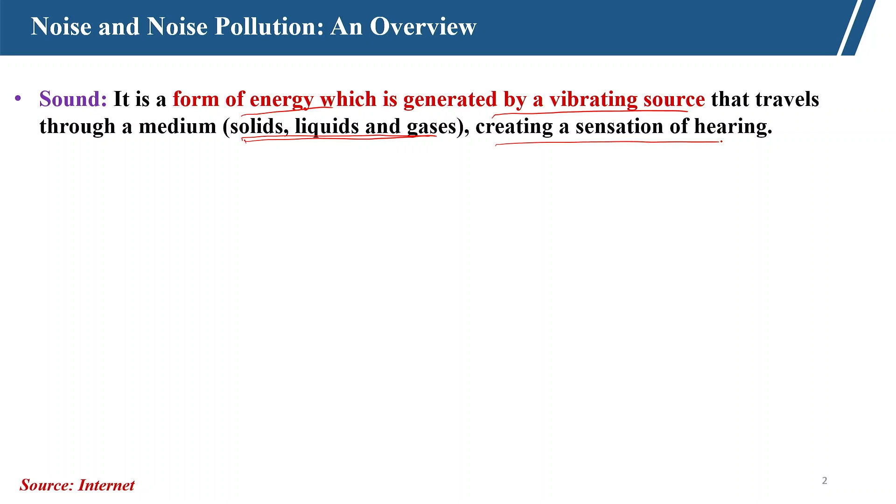Noise is basically a form of sound. Sound is a form of energy, generated by a vibrating source. If there is any vibration, it will generate some energy and finally form a sound. That sound may be within our hearing range or may not be, but it is energy generated by a vibrating source, and the sound can travel through any medium like solid, liquid and gases. For travelling, sound needs one medium, and when it travels and reaches our ear, that creates a sensation of hearing.

Now we can see this is the sound source which vibrates the air particles here, and air particles travel through one medium. Here suppose the medium is air. So through this medium, this travels and reaches to our ear. Due to the vibration, due to this energy created, the air molecules, the particles will start vibrating back and forth, which will create one dense zone and one light zone, and this will travel in this manner. But the particle will not travel, only the wave will travel; the particle will vibrate within this zone.

So, we will discuss this a little bit in detail and try to understand the various forms of sound. The noise is a little bit different; it is a form of sound, but it is generally defined as the unwanted and unpleasant sound. That is called noise, and it can disturb daily activities and reduce the quality of life. So, noise is a form of sound, but when it becomes unwanted or unpleasant, then we call it noise.

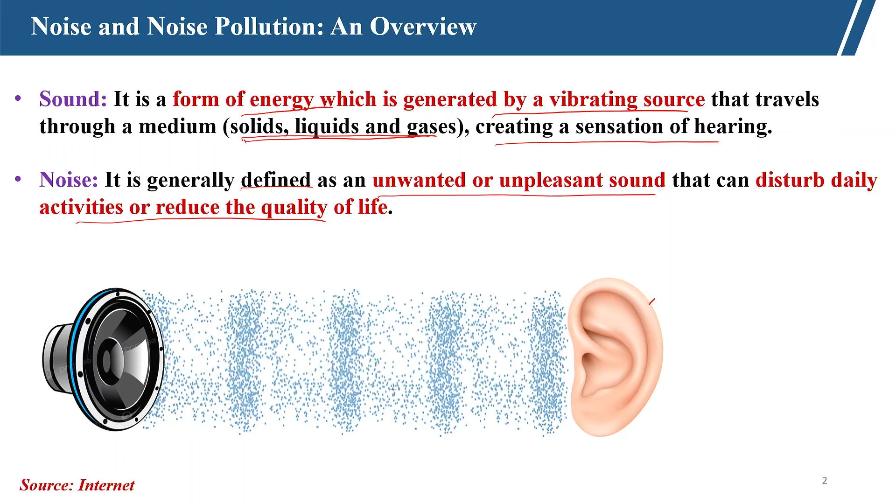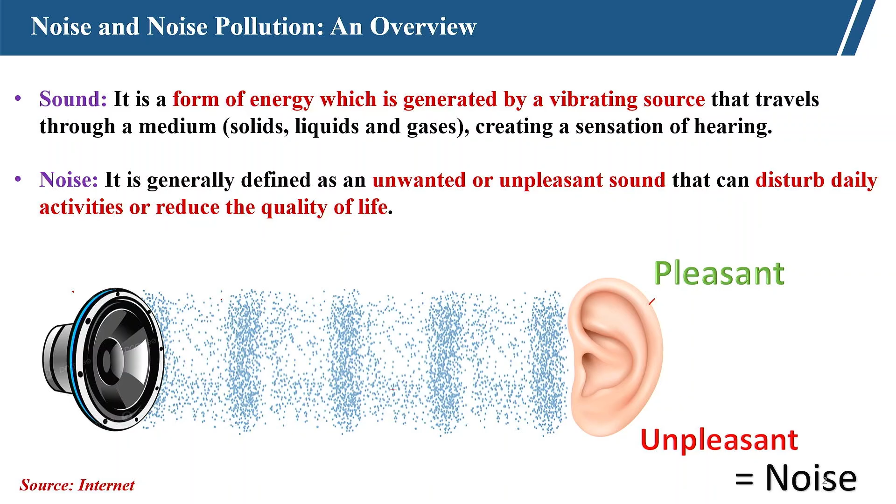So, it may be pleasant - sound can be pleasant - and if it is unpleasant, then we call it noise. So, our main focus is noise which is actually harmful, not only for humans, but for other animals also. So, first we will try to understand how this noise actually affects humans in different ways, as well as animals. So, if we know the problem, then we can control this noise from the source itself.

So, as I have mentioned, all noise is sound, but not all sound is noise. If it is pleasant, then we will not call it noise. Suppose a beautiful song someone is playing, which is not creating any unpleasantness, then we will not call it noise. But if someone is playing at a very loud voice, then the same song, same music may be disturbing, unpleasant - so then it becomes noise. So, there is a fine line to differentiate sound from noise: sound means a pleasant sound, or noise. So, the factors here are its intensity and loudness. Suppose one music is played with low volume, low loudness - then it can be pleasant, but if the intensity of the same music is high, it has become loud, then it will become noise.

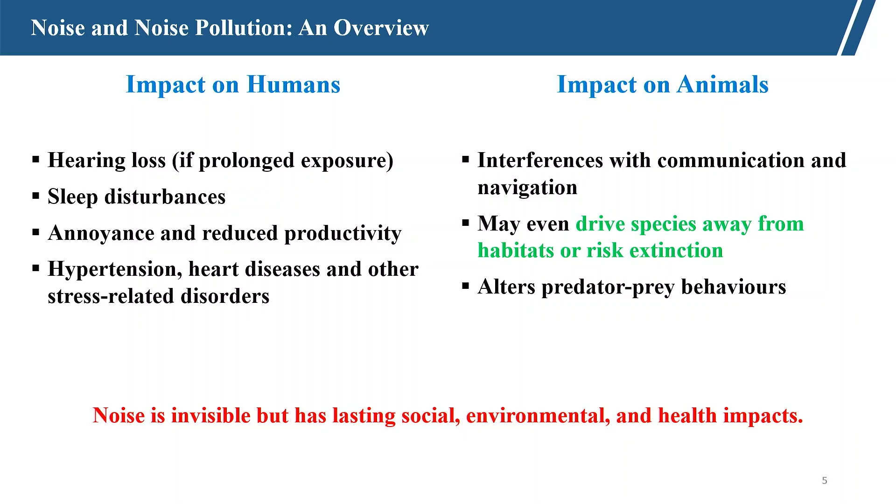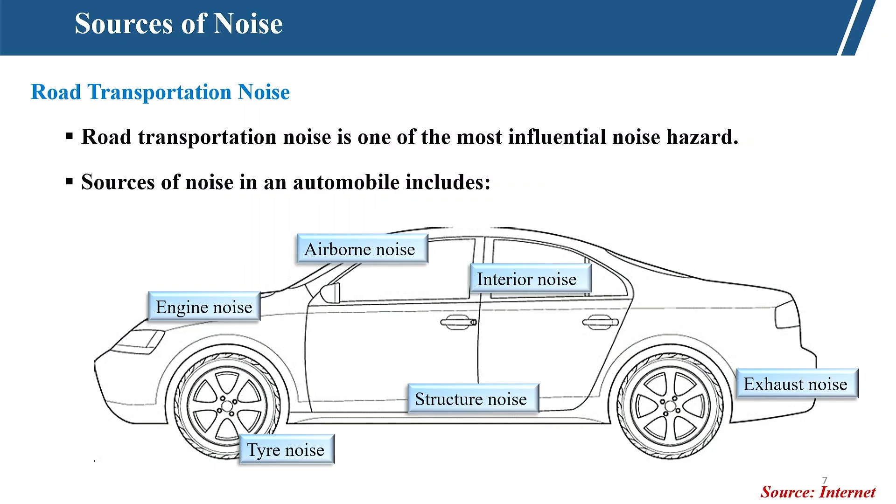Like in exhaust noise, there will be noise during exhaust, but can we reduce it, can we minimize it? Yes, we can minimize it by using a proper insulator, which is mainly textile material. Even engine noise, even total interior noise, we can use textile material to reduce the noise inside the automobile, even for outside people.

Engine noise is a major noise generation source, coming from combustion noise and mechanical noise. As we know, during combustion there will be noise, and during the mechanical movement of the parts there will be noise generation. So we can try to minimize it, but it is not possible to eliminate. If we select the textile material for sound insulation, we can reduce the noise to a greater extent.

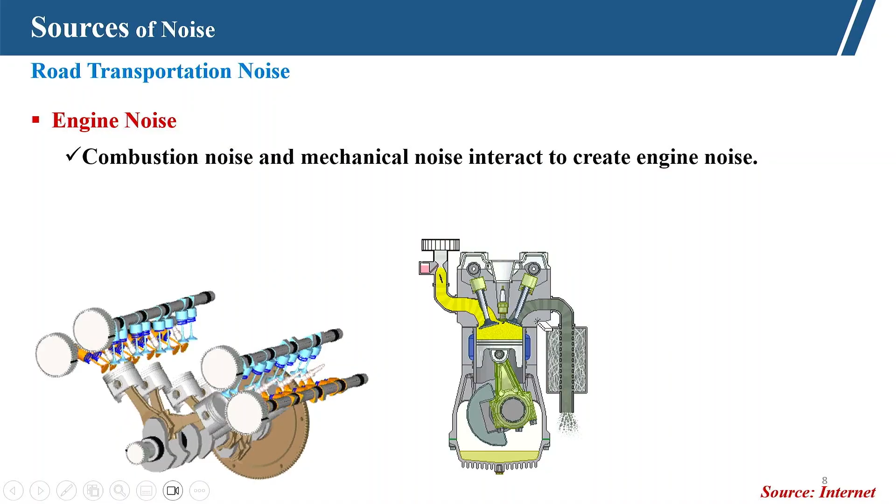Here you can see that in the exhaust, at the exhaust pipe, we have used the textile material as shown, which reduces the noise to a greater extent. The engine hood liners are used to absorb the noise emitted by the engine other than the exhaust noise. So exhaust noise is also reduced by textile material, but with the hood liner in the engine, that will absorb some energy - absorb the noise which is emitted from the action of the engine.

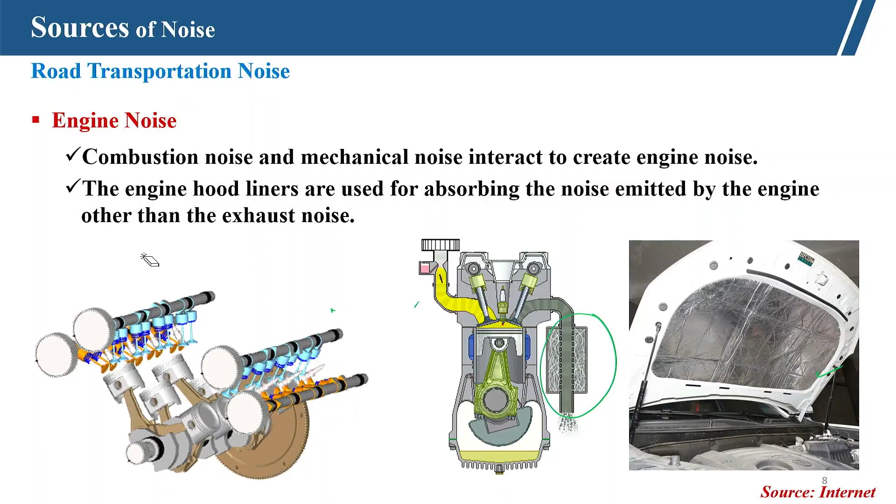Next is road and tire noise, a great source of noise when a car is moving at high speed - that interaction between the road and tire. It is produced by friction and contact of tire with the ground, and that actually generates lots of noise.

Mainly due to that, the tire will have certain design for gripping. This is a tire - let me draw one here. Now if we see the tire surface, it is not smooth, there will be some serration, some grooves created. These grooves are created to enhance the grip with the road, so that it does not skid.

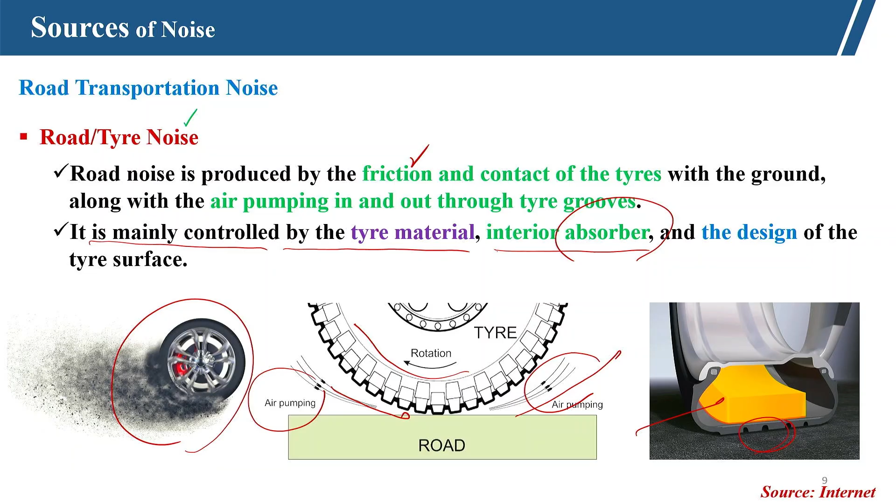We can see that here it is mainly controlled by tire material, interior absorber is there, so we can have certain absorber and the design of the tire. You can see here these are the grooves created within the tire, and inside we can have certain sound absorbers, and even tire material which will optimize the friction. So air pumping in, this is air pumping in when it is rotating clockwise, and here air pumping out, and you can see this is due to the friction. So all this generates the noise.

Next is wind and airborne noise. Due to wind there is a lot of noise generated. Wind and airborne noise occurs due to the drag of the vehicle and its parts like the windshield, mirror, engine compartment - that is through air when it is moving. So a drag is created.

Airborne noise is controlled by improving the design and shape of the vehicle. If we have modern designing where the air friction is less, we can reduce the air friction. So proper designing is required to reduce the air friction, and if we can reduce the air friction, then the noise can be controlled.

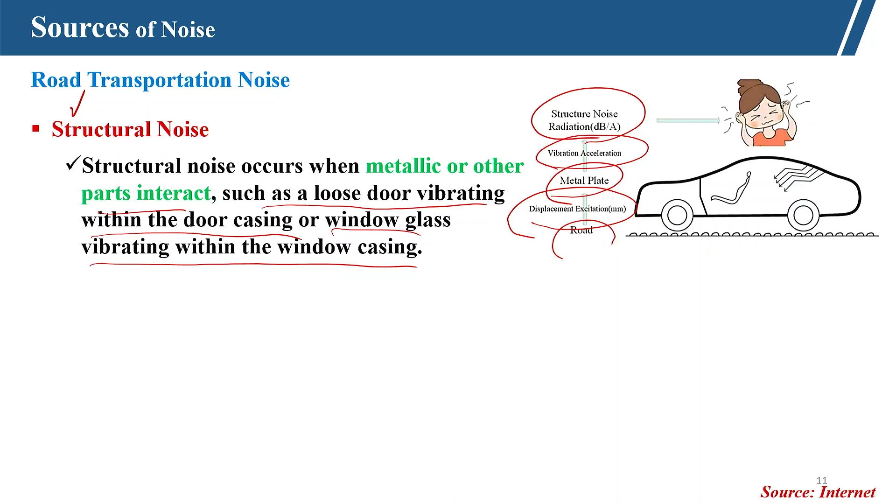Structural noise also is a major source of noise, and this is mainly in the older type of car. Here we can see the structural noise: road is there, then displacement excitation - there will be displacement due to the metal parts, then vibration acceleration, it will start vibration, and structural noise radiation due to the vibration is there. The structural noise occurs when metallic and other parts interact between each other, such as a loose door vibrating with the door casing or window glass vibrating with the window casing.

So if there is any loose component that will generate vibration - that is structural noise. It is reduced by avoiding loose joints and using noise dampers and absorbers. In between we can use noise dampers which will reduce the structural noise, and these noise dampers are most of them made of either rubber, composite or textile material. This is structural noise.

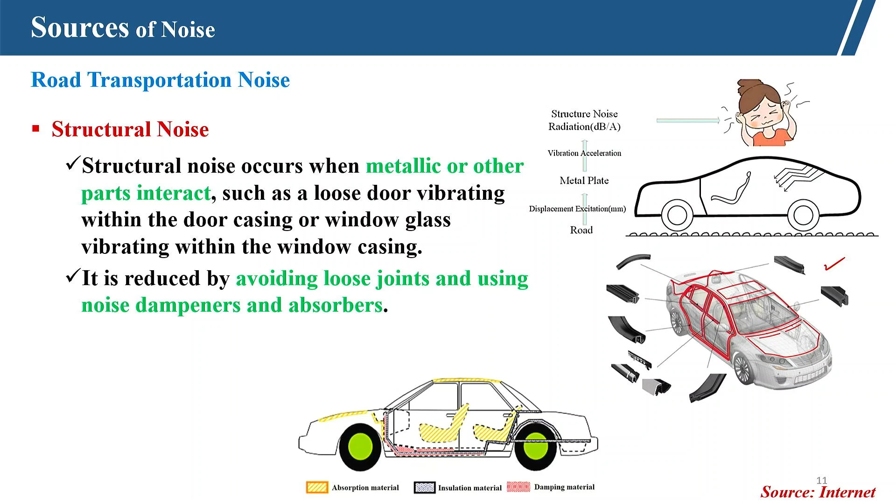Then exhaust noise, which is a great source of noise. For that we need a silencer, where textile materials are used for noise control. Combustion gases travel through the exhaust channel, and the noise by fuel combustion and gas flow combine to form exhaust noise. So gas flow plus fuel combustion combine - the actual combination generates a huge noise at the exhaust.

If the combustion is not proper, then it will generate very high noise. It is mainly reduced by using silencer or mufflers at the end of the exhaust channel. In the construction of the muffler, layers of textile materials are used to absorb this noise. We will discuss that in detail subsequently.

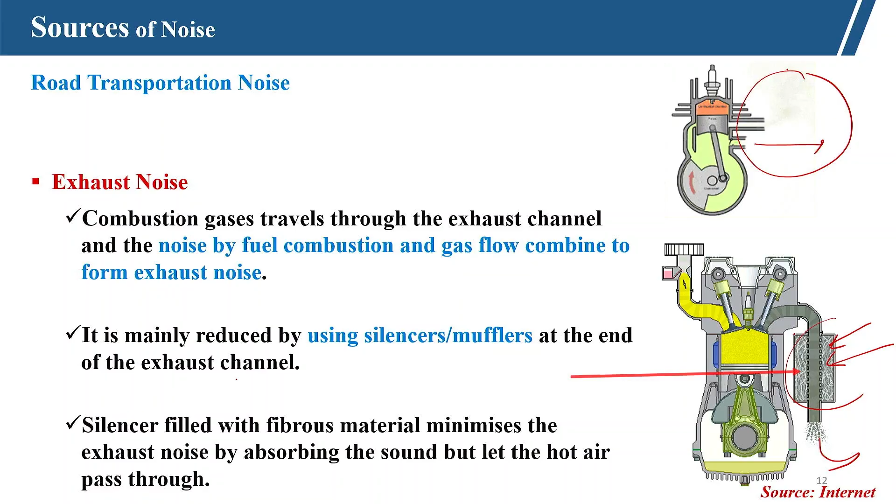So, road transportation interior noise - this is basically created by the music system. If we can control the pitch and volume, then this noise can be a pleasant noise, that can be music. It is not a noise for all the passengers, but a noise for the outer environment. If someone is using a louder voice, that may not be for the passenger, but for the outside environment. So, that may be noise.

Interior sound also includes this - to prevent this sound, sound absorbing panels and nonwovens are used to absorb interior sound, and the carpets which are used also act as sound absorbers. So, sound absorbing panels, nonwoven panels, or even carpets are there to absorb this unwanted sound. The body helps in noise escape to the passenger component - this nonwoven will absorb the noise here, but the body, the metallic part, will help in the transfer of sound to the environment. That way we can control this interior noise.

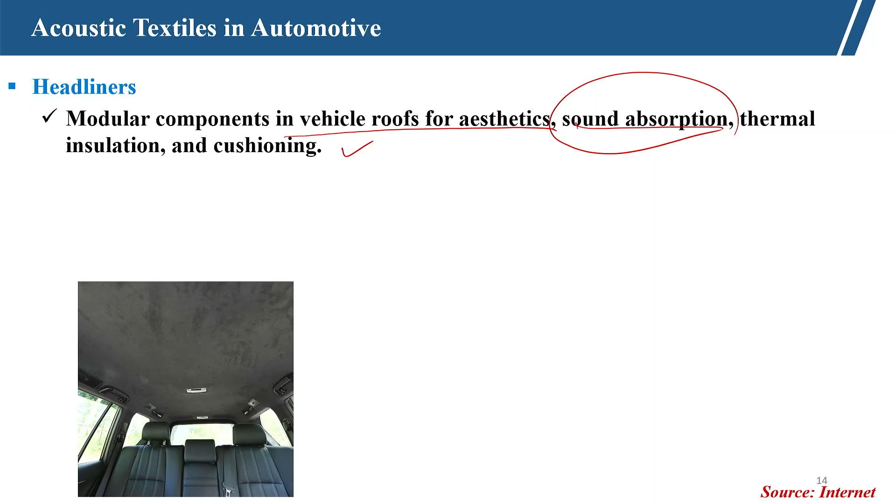Now, the construction of headliners - they are basically multi-layer, typically 3 layers are used. Decorative fabrics are used in the inner layer, decorative textile materials. Then there is a foam, decorative foams, which also helps in sound absorption, and fiberglass matting and adhesives are used. That is the core substrate, which actually provides insulation, thermal insulation, and at the same time acts as a sound absorber, helping in sound absorption. So there are different layers of material which absorb the sound.

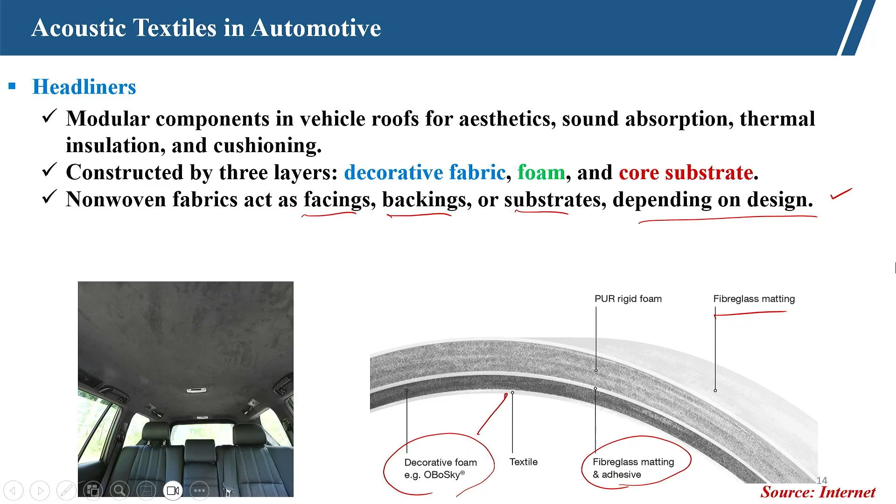Nonwoven fabrics act as a facing, backing or substrate depending on the design. Nonwoven fabrics are used in most of the cars, widely used for sound absorption, as a noise reduction tool.

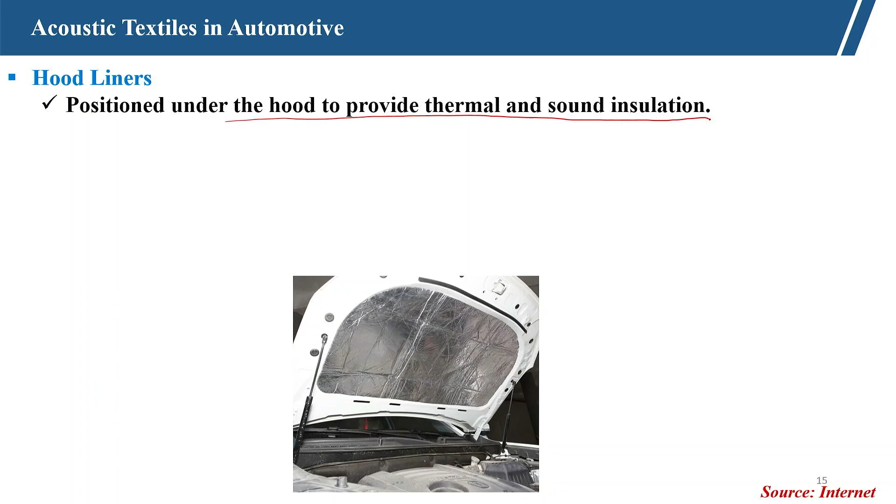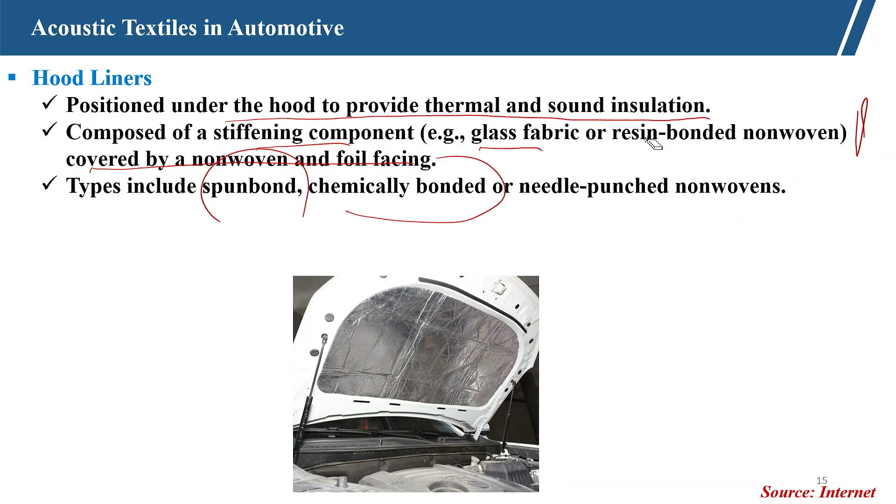Then comes the hood liner. These are positioned under the hood to provide thermal and sound insulation. It is composed of a stiffening component like glass fabric or resin bonded nonwoven, covered by nonwoven and foil facing. So hood liners are made mainly of glass fabric or resin bonded nonwovens. The nonwoven types include spun bonded nonwoven, chemically bonded, or needle punched nonwoven.

Then trunk liners are there, used in boot or luggage compartments, including the boot liner facing, parcel shelves, rear panel, and fold down seat backs. So in all these places we use textile materials for sound absorption.

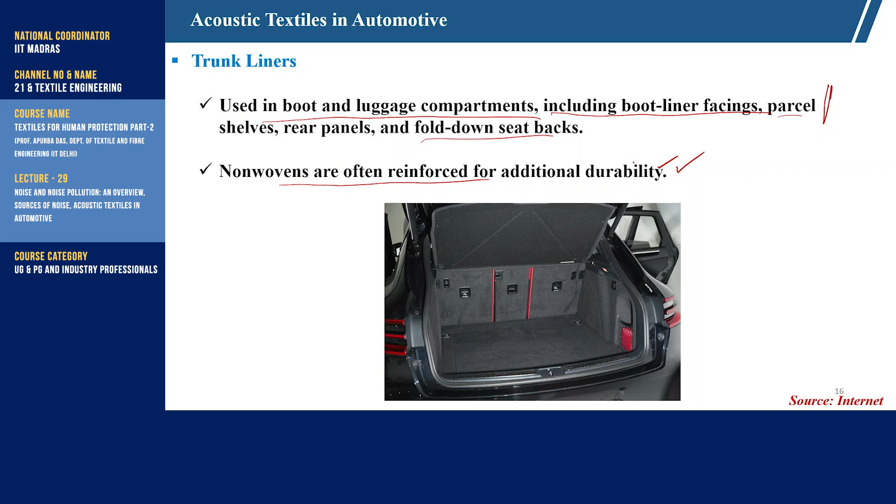Here nonwovens can be used as a composite, reinforced for additional durability. Sometimes with a matrix material we can reinforce this nonwoven, or we can use a scrim material, so some additional component is added or sandwiched to increase durability, or sometimes we reinforce with a rubber coating on one side - that will increase the durability of the nonwovens.

Door panel and parcel shelf - these are the door panels where textiles are used. Nonwoven fabrics are used in the door trim, door panel trims, inserts, reinforcements. Even in floor covering we use nonwoven fabrics, made of tufted or needle punched fabrics, usually spun dyed polyamide, polyester or polypropylene, which helps in absorbing the noise.

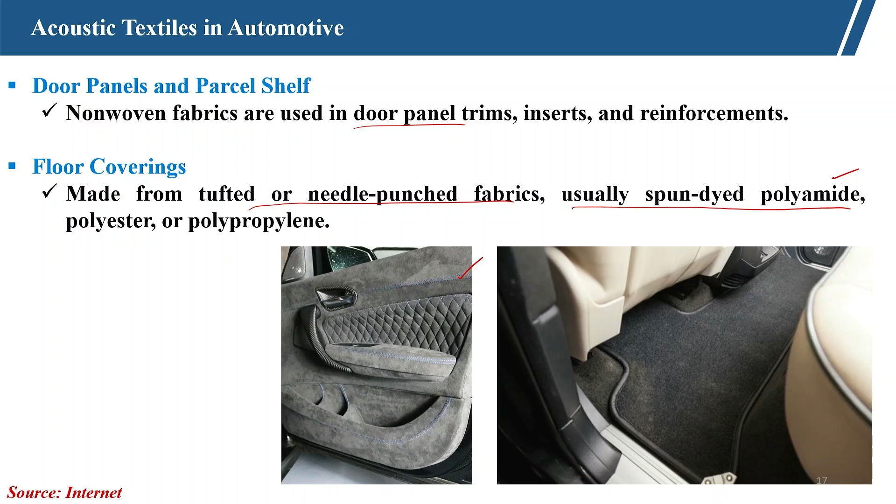Apart from road transportation, air transportation also creates a great amount of noise, a significant source of environmental noise, especially around the airport. These are basically aerodynamic noise generated due to air turbulence around the wings and different portions of the body, control surface, fuselage - different places generate sound. Its intensity depends on the speed and altitude of the aircraft, and is especially high for low altitude and high speed military airplanes. So different types of noise are generated depending on the speed and altitude.

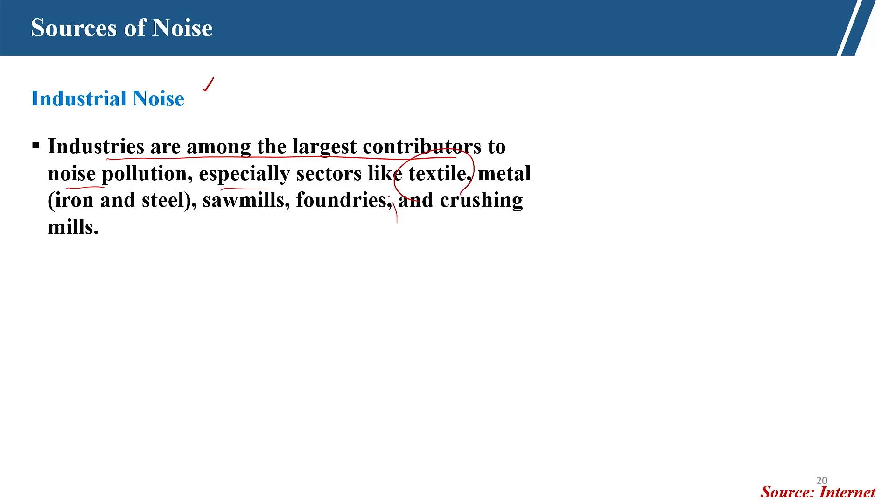Metal sector, iron and steel, sawmill, foundries and crushing mills - all these industries generate huge noise. Cement industries too.

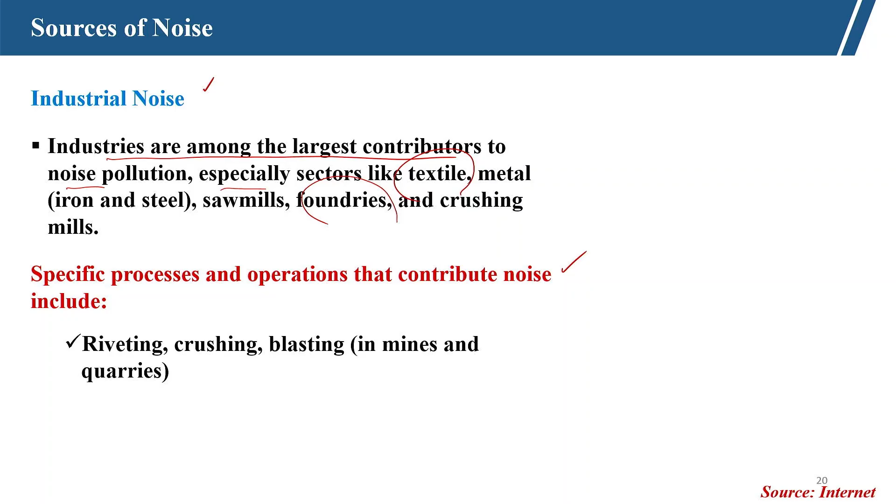The specific processes and operations that contribute noise include riveting, crushing, blasting in mines and different places, lathe operation, drilling, punch press, and pneumatic tools. In all these operations, like stone crushing places and lathe operations, a lot of sound is generated.

So here we have to protect ourselves. Either we prevent or reduce the noise at the source, or we can protect ourselves from this noise by providing certain noise control mechanisms.

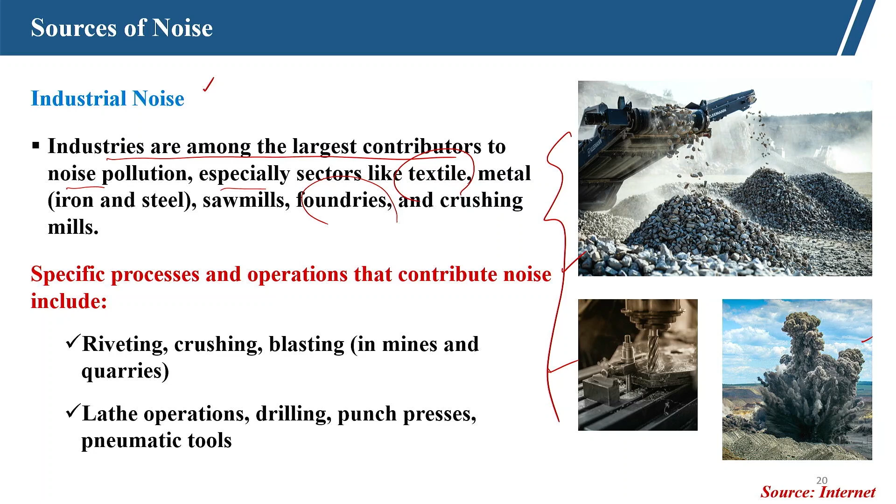In industrial noise, you can see drop forges, plasma jet, sand blasting, tumbling barrels - all these operations generate huge noise, like weaving machines, boiler making, grinders, milling machines, and furnaces. Everywhere it generates noise.

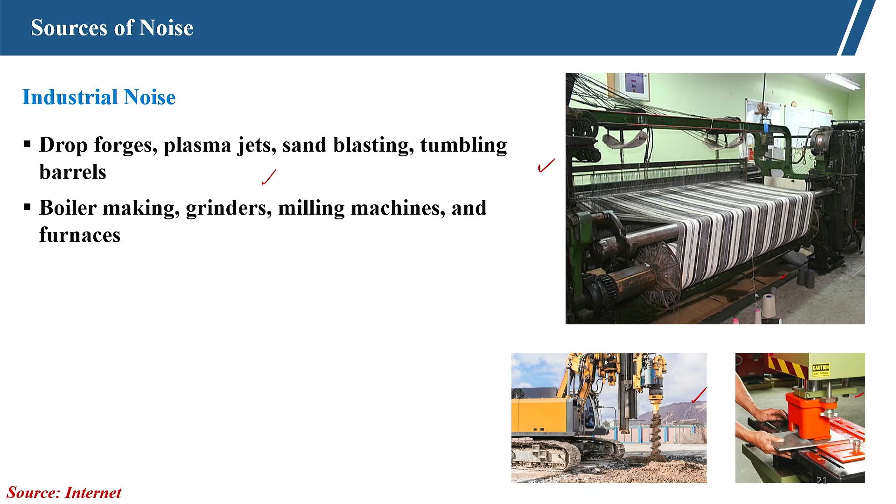These activities often create a continuous, high level of noise in the environment, which is more dangerous, affecting workers and nearby communities. The worker has to be there, and the community near any industrial activity will be exposed to this high level of noise continuously throughout the day and night. That is the problem.

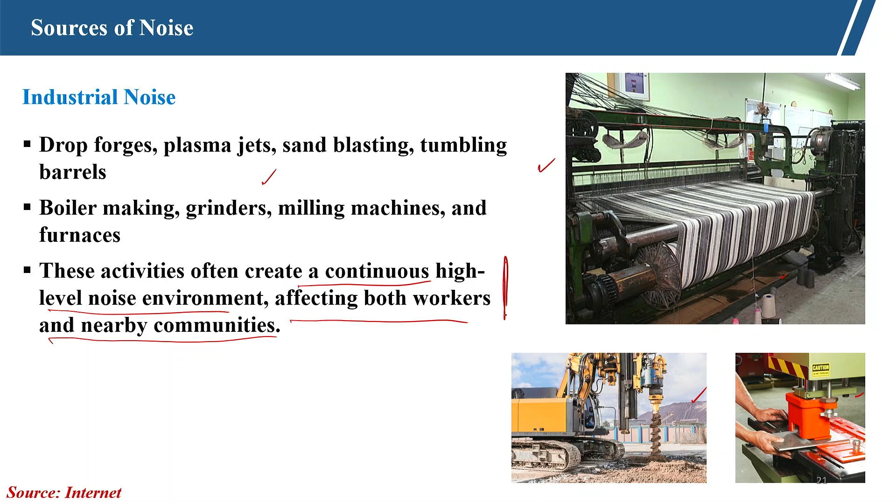Apart from this, household noise is also a great source - household equipment generates significant background noise. Common appliances like washing machines, vacuum cleaners, mixers, grinders, refrigerators, air conditioning, television and music systems all generate noise.

There is a need to reduce this type of noise if possible. While often considered routine, continuous exposure to such noise can reduce our comfort level and impact well-being, especially in densely populated residential areas.

In densely populated residential areas, this type of activity happens in close proximity continuously. Suppose in one particular residence it is working for some time then stops - if it is densely populated, the other residence will continue the same thing, and that creates noise pollution.